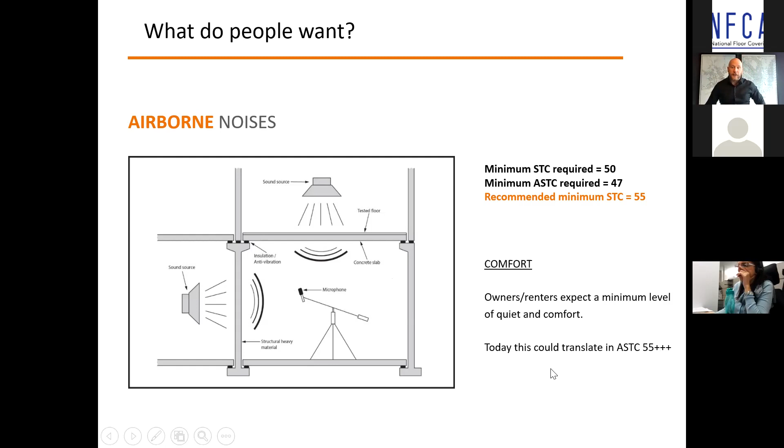Okay. As far as impact, a different animal completely. There's no IIC required in Canada. Therefore, there's no AIIC required by code, but the recommended minimum is still 55. So the building code recognizes that it should be about the same number, but it's not required by code. Ironically enough, 80 to 90% of all complaints we see come from impact transfer.

And Chris, your example with the water bottle could be expanded to moving furniture, to walking around, to dropping objects, opening doors. Anything in contact with the structure is creating nightmares out there for all kinds of structures. So we see it day in, day out.

And ultimately, the level of comfort people are looking for, there's nothing to justify it be lower than the one on the airborne. Meaning, we should most likely shoot for 55 and higher, and too often we end up much lower than that. What that means is we often see a discrepancy, because it's not in the code, between the STC and the IIC. So the number of times we see a building shooting on the airborne side, whether it's floor ceiling assembly or wall to wall, 55 plus, but then we see the IIC in the 40s is weekly,

which creates obviously a major issue, because people are not complaining about the sound they hear as far as television or noises or voices, but they do hear their neighbors walk or moving furniture or kids playing. So ultimately, what I am saying is, again, people don't know what the code requires or even recommends, but as far as we're concerned, a 55 plus should probably be what we're shooting for, because that's what consumers, condo owners, renters, or even going to a hotel, that's what they expect more than ever before.

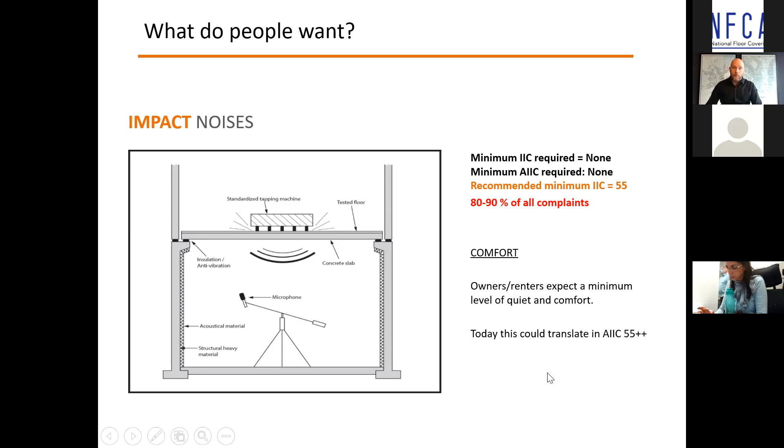Okay. The other thing that obviously is related to issues would be misunderstanding and application of the principles. So last month, we covered pretty basic acoustic principles: mass, resilience and decoupling, void treatment, sealing and flanking. So right now I'm addressing this to people involved in new construction, but also retrofit.

A lot of times when we're building, I'll give you an example on a light wood frame building. A light wood frame building, all of a sudden, because of cost and everything else, we start reducing the weight load of that particular building, but we don't realize that it will have a direct impact on how noisy and how much vibration is going to go through that particular building. So a lot of times we make design-oriented decisions without necessarily understanding what the downside is going to be. And we see that a lot. So that's a good example.

The mass is, do we have mass? Example, if a strata has a wood frame building and there's no topping, there's no mass, well, you cannot expect out of the gate the same performance, despite the underlayment you'll have to ask for. Your building is still not going to be at the same place as another building that may have a topping or that may be made of concrete.

So understanding that mass, resilience and decoupling, which is directly linked to how much vibration is making it through the structure, how much void treatment. So ultimately, if it is a light wood frame with a ceiling, how much insulation is in there, ceiling openings, pot lights, air vents, ductings, all these kinds of things. How treated is it, whether it's new construction, and what we're going to do in a design stage, but also on the existing building, what was done when it was built, and flanking.

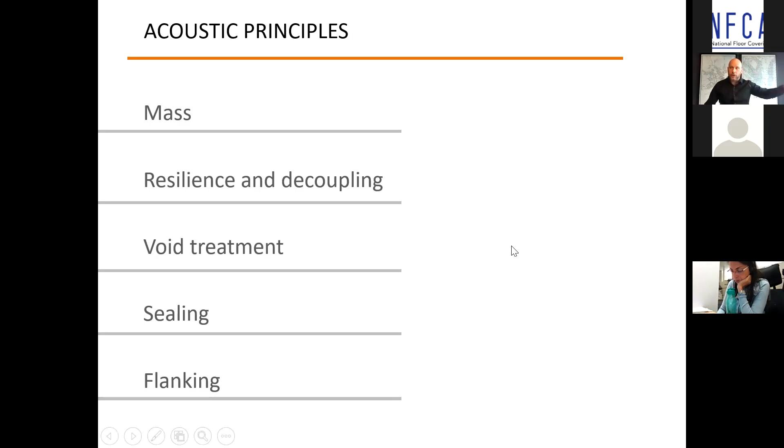Okay. So again, if you want more information on these with videos, which we showed a month ago, be more than happy to show that to you. Please. Just to give you a sense of what happened in that file with those two videos, there's nothing that they can do to retrofit or change that building. No one's going to rip out the flooring, take apart the structure and put it back together.

It's not going to happen. So we just came back with a bunch of advice. Covering the high traffic areas with 60% area rugs was one. Have a meeting between the two owners so that they understand that one is not just a hostile, nasty person who's trying to keep them up all night.

Yep. Convey the time schedules. Like one person was going to bed at a certain time, which was, you know, an active time for the person above. And you find that you can get people to work together, provided they understand what the problem is. No one wants to upset anybody. So that was an interesting case. And I think we got them over there. They realized there's really nothing they could do. They just had to learn to live together.

Chris, those are phenomenal points. Ultimately, especially on an existing building, you're dealing with perceptions, you're dealing with humans. People hear things differently. That's why I referred at the beginning to expectations, but also you're correct. In some cases, it's going to be hard to apply some of these principles depending on the situation, but at least understanding where it's failing or where the issue can come from points us in the right direction and we're not fixing the wrong problem. And more importantly, we're not spending money on things that are going to be completely irrelevant. So this is a great example and good add-ons.

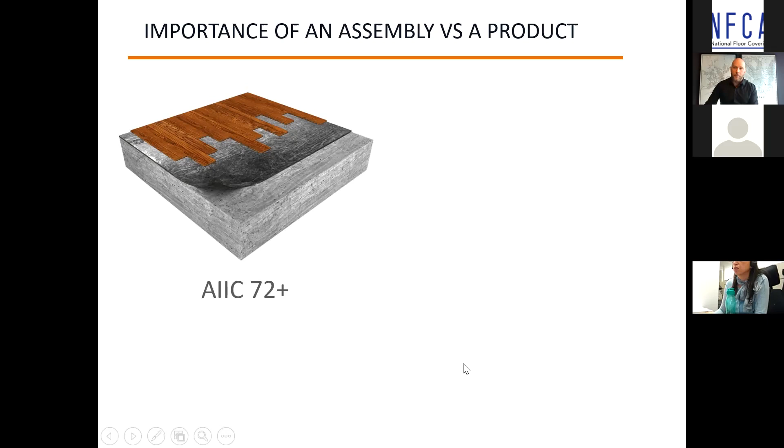We see a lot of high numbers being thrown out there right now in the flooring industry. Even though a lot of people are aware those numbers aren't achievable, we don't always know where they're coming from. So first, you can never associate a rating to a product. I've probably said these exact words 1,000 times, if not 2,000 times in my career. When you're doing a test, you're testing an assembly, not a product. So if somebody shops in a store and says, I need an underlayment that gives me a 72, we're already wrong, assuming the underlay itself is going to give any kind of rating.

It will contribute, but we need to know what it was tested with and where it's actually going to contribute to better performance. Because I've also seen adding products into an assembly that did not bring anything. I've even seen it make it worse. So we have to know the building structure and the context of that particular assembly, application and building. So what we should do is, somebody walks into a store looking for data: okay, what is your building structure? Do you have the drawings? Do you know how it was built? And if we don't, it'd probably be interesting to talk to the condo board and gather that information.

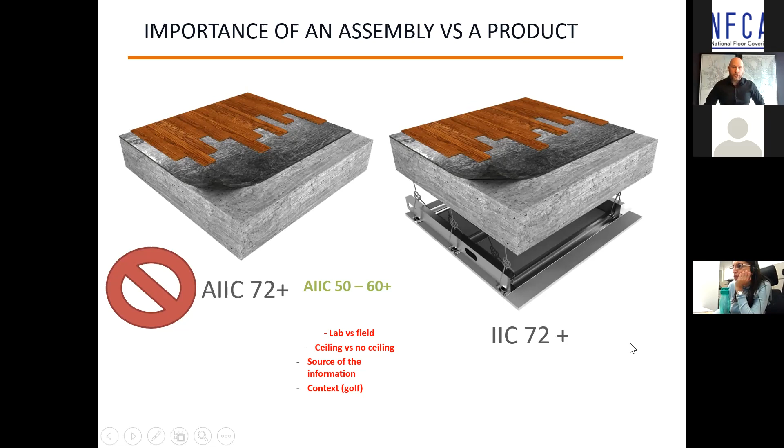Role played by the structure. Again, we're into the design, understanding what the building structure is capable of. It's not true that because you're on concrete, you're good to go. High frequencies on concrete are a lot more problematic than people think. Chris, if you had done the water bottle drop example on a concrete slab, you would have been surprised how noisy it is in the unit below.

It's actually very prone to transferring high frequency, like dropping a water bottle, high heels, or moving furniture. So concrete structures are not as bulletproof as people make them sound. There are certainly some areas we've got to be careful with. And steel, wood frame, and mass timber, we'll touch on in a minute.

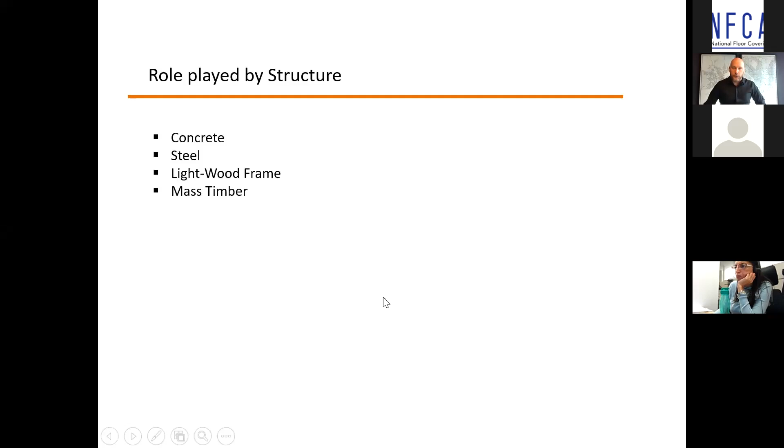Yeah, I remember being in a concrete home one time when the people were renovating upstairs, and they were using a Kango-type jackhammer to get the old flooring out. That thing may as well have been right beside my ear. It was absolutely transferred 100% into the space below.

100%. It's interesting that you make that observation. That concrete's thought of as being a great way to sort of kill noise, but it's not necessarily. You're 100% right, Chris. And again, it's coming from thousands of tests, and if you look at the slide, the concrete towers, the concrete slabs are going to be very efficient for low frequency. Low frequency and then high frequency would be your knuckles on the table versus your fist. So low frequency, very efficient, no doubt about it, because it's heavy.

Whereas the high frequency, the jackhammers or anything that's more of a distinct kind of sound, or something quite hard on the slab itself, or even if it's a glue down vinyl, whatever it may be, it's very distinct and it travels through the whole building a lot easier than we think. So you're correct. It's not as bulletproof as we think.

And one of the biggest differences between concrete structures and other structures is there's usually no ceiling. What that means is you find yourself having a hard surface floor, possibly an underlayment if there's one, and a concrete slab. You have one shot at applying the principle of decoupling in that application. Yeah. You can only do it once. So you better choose the right thing that's going to compensate for that lack of performance on high frequency. So when we get to the underlayment, I'll touch on that.

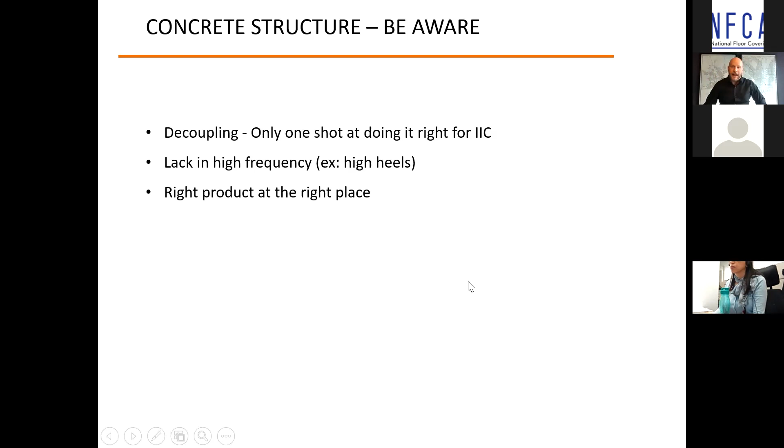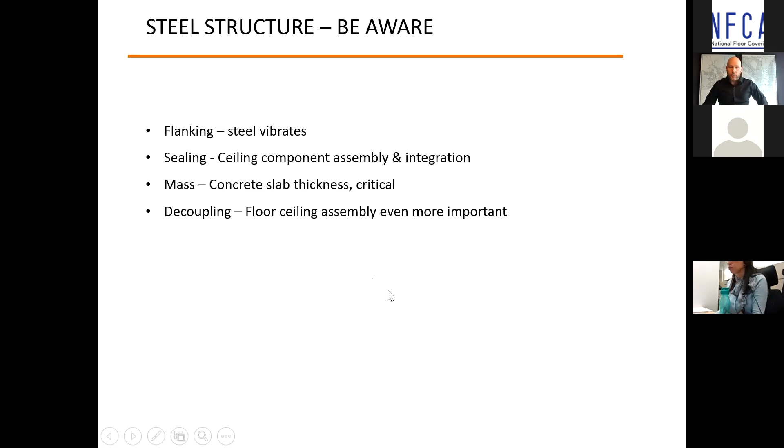Similar with flanking, again, steel structures, steel will vibrate. A bell at church isn't made of wood, it's made of steel. It vibrates so you can hear it from a distance. This is no different. When you're dealing with steel structures, it will vibrate. We need to mitigate that vibration. We need to control it somehow. Good news is there's obviously solutions to that at the design stage, whether it's in the ceiling or underneath the floor. So there's assemblies that are designed to do that. Okay.

Light wood frame, a lot of components to play with, which means we can do some great things. But a light wood frame, by definition, because it's lighter, all of a sudden you're running out of mass. Decoupling is even more of an issue. Ultimately, because it's porous, if you create vibration and energy, it's going to travel all throughout the building. So wood frame buildings tend to have a bad rep. But if we actually play with the components, apply the principle, manage expectations, we can do great things. But only if we do that. If not, we're stuck in the 40s, and then complaints and lawsuits are up to wazoo. We see it day in, day out.

That's even more true on existing buildings that were built 20, 30 years ago, because some of the technology was not even applied then. Imagine when you have a wood frame building, 4-story or 3-story, and there's absolutely no mass. The floor is directly over top the plywood. Well, then you're in trouble out of the gate. You haven't even started, because ultimately that vibration is going to have a party making it to the unit below.

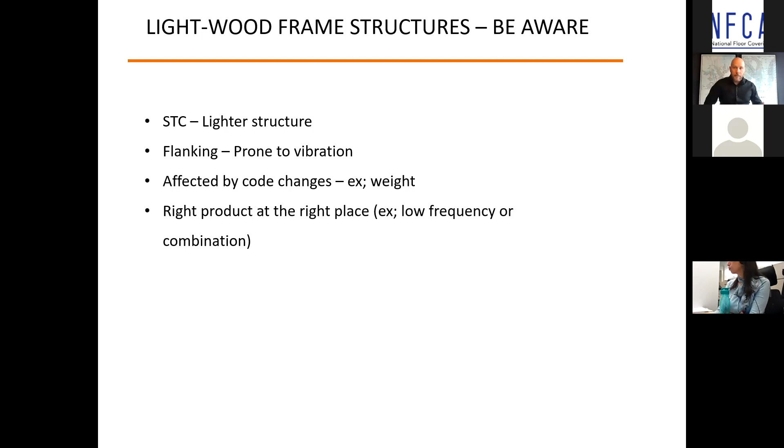Okay. Andre, we're at the 1:30 mark.

Perfect. Thank you. So mass timber, for those of you that are aware of what mass timber is, obviously the big thick slabs, it's getting extremely popular. But again, a concrete tower, imagine that made of wood. If there's usually no ceiling because people want to see the wood underneath, that means you better do a really good job at decoupling on top, because the slab of wood is lighter than a slab of concrete, which means the principles are playing against you.

So there are solutions to that at the design stage, but we need to look at it at the design stage. If we don't, we're going to find out the hard way that the building is going to be vibrating and flanking like no tomorrow. And then obviously it's directly linked to issues, complaints, lawsuits. And we've heard of them.

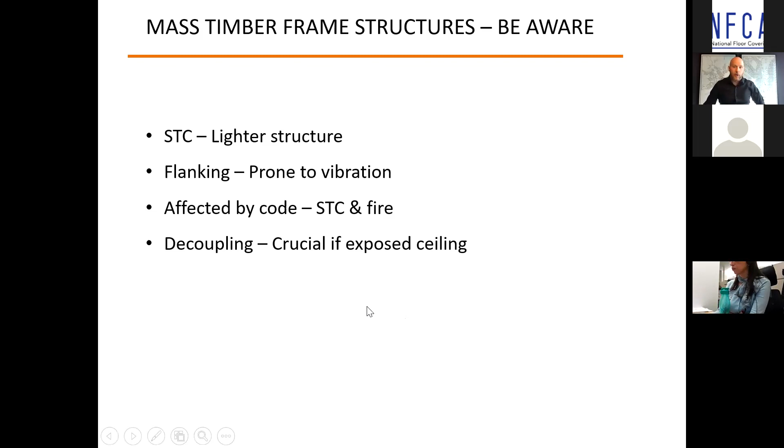We've worked with people that had issues that will never want to go through that process again. Okay? Andre, just on the topic of products, when you mentioned that, it's interesting. My mind sort of visualized, what would you put over that wood substrate to kill the noise or decouple the noise when you got the people down below want an exposed ceiling because they want to look at the beautiful

wood. I remember back in the day when we did a few of the floors in the Wall Centre, and they, on that job, specified a 1/2 inch thick rubber product, which was ribbed halfway through. So quarter inch of it was ribbed, like corrugated almost. And we had no idea whether this was actually going to work. It was really expensive. But what do you recommend as a product that might kill sound in a wood frame structure with that scenario?

So understanding the NFCA format, I'll be cautious with my answer. Put it this way, Chris. There are solutions and there are products. We have products in our lineups. It's not only often like an underlay, there are structural systems that exist that are designed to compensate for that mass, and in the meantime, creating that decoupling. So we have systems for light wood frame, for mass timber, that are designed to do exactly that. But the only way you bring a product to market in these applications is understanding how that structure is going to work and where the weakest points are going to be.

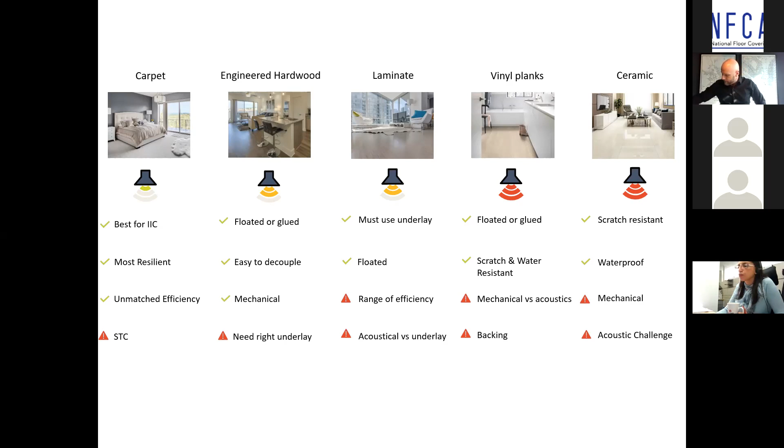Yeah. Okay. So there are ways for that. Question, Andre. Yeah. Kim Anderson in Winnipeg. Just a quick one. Now you're testing specifically on the entire sandwich, everything that's in between. Yes. But if a designer, let's say, who's getting befuddled by all these IIC figures from suppliers selling it to them, I think we talked about this in the first part, was ASTM E2179, which has got to do with sound impact reduction.

If you wanted to compare product A against product B, that's probably about the best you're going to do, and you're going to find out they're probably pretty much the same. Because say on resilient, 2 millimeter resilient, you're going to get a sound impact reduction of, I think it's 5 decibels. On a say a 5 millimeter click product with an acoustical back, the sound impact reduction's around 20 decibels. So now you have a comparative product to product, not IIC, not the whole sandwich, just component to component.

Is that? You're referring to the delta to some extent, correct, Kim? 100%. Yeah. I'd love to, because you interviewed last time and I enjoyed your comments, and I enjoyed it now too. I'd love to have a conversation on the side with you on that front, because the delta, there's certainly some great things about it, but there's certainly some little angles to it that we need to pay attention to. But you're correct. I mean, it's a good indicator.

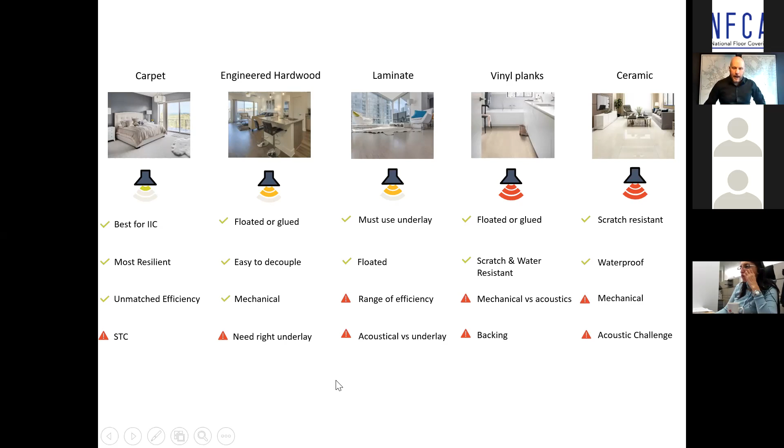So ceramic, again, very, very hard, extremely difficult to sound insulate. So once again, using the right product underneath, there is a way to soundproof tile more than we think, but it's never going to compare unless you build it up to a different floor covering, simply because it's much harder. Underlayment, we kind of touched on that. I'm not going to go into this. So ultimately, using the right thing at the right place, I'm telling you, it goes a long ways. In some cases, a certain technology will outperform another one, and then the exact opposite on a different assembly.

So to some extent, if we understand the principles, where the weaknesses are. For example, if we work on a building where the high frequency is more problematic, we'll cover the high frequency with the right underlay. If it is a low frequency that we're going to run into, we're going to cover the low frequency with the right underlay. So dealing with people that understand this and are able to navigate through this, you'd be surprised, for the same amount of money, how much more performance you can get simply by using the right thing. Okay.

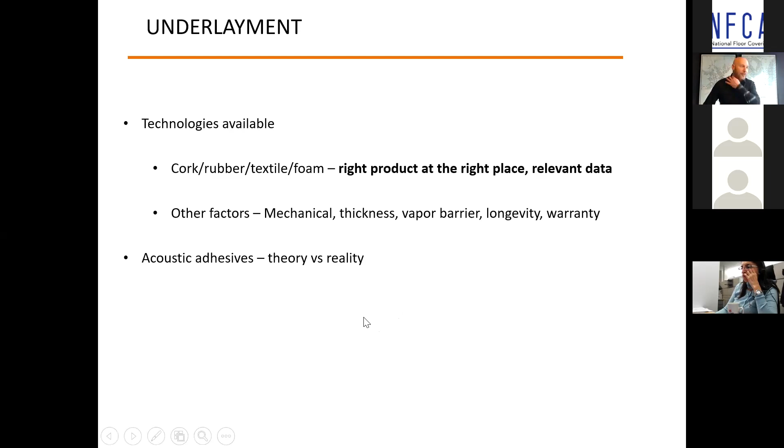Installation, and I'll finish on this, Chris. A couple of little tips. Obviously, it goes without saying before installation, proper surface prep and site conditions. I mean, the NFCA, you guys are extremely involved on that front. We cannot stress enough how important it is. Decoupling the floor covering from the structure goes a long ways. You can decouple the floor all you want, but if the floor is touching the wall or we're bridging some of the components, it can obviously be devastating to the overall performance.

Decoupling furniture from floor covering, huge. So when you're moving a chair, it's not hard on hard. It's ultimately like a pad underneath. It's going to go a long ways. Percentage of surface covered by area rug. You touched on that a little bit earlier, Chris. Not everybody wants to do that, but to some extent, if you are in a position where nobody's changing the ceiling or changing the floor, well, you're kind of running out of options. So yeah, covering some of the traffic areas with rug is certainly going to muffle a lot of the vibration that can be created. No doubt about it.

Avoid ceramic tile in common or high traffic areas. Ceramic tile conducts more than anything else. No questions. So ultimately that is something that we would recommend depending on the situation. Using professional installers. Obviously the education with the installers, we're all about it. To make sure again that they understand what we're trying to do all together, and everybody gets together at the design stage, and then follow manufacturer's recommendations, which would touch obviously on the mechanical and everything else. So those are some tips on that front.

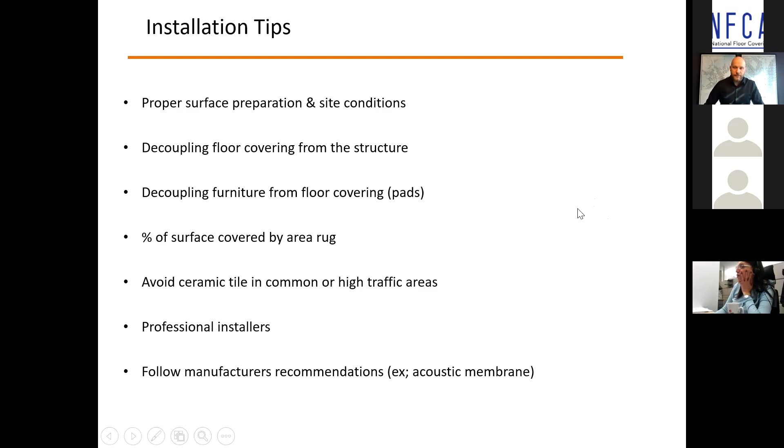I think it's a great list. You just made me think again that I'd underline in the specs, if this is possible for any spec writers out there, the importance of leaving that expansion gap around the perimeter for the flooring. The manufacturer requires it anyway. If you don't, and you leave the floor tight to the wall and there's expansion, all that floor experiences is stress at the joints. Not only does it start to creak and squeak, but you're now going to have that tuning fork scenario where noise gets transferred from one floor down to the floor below. So how do you underline installers leave expansion gaps? We see it all the time in inspections. The number one thing that is causing problems out there is no expansion gaps.

They don't respect it. And not only that, Chris, I can even tell you in the ceiling, we work in the ceiling, right? So short circuiting a resilient channel or a suspension system. Anytime we short circuit anything, anytime we get something to touch something else when it shouldn't touch, you're going to jeopardize performance. And we see crazy differences between something that's installed properly and something that's not. It's unbelievable. You can see 5, 6, 7, 8, 9, 10 IIC difference between the two, even though it's the same products used in the assembly. It's extremely important. Yeah.

I'll finish on this and we'll go to Q&A. Requirement versus expectations. People expect more than what the code asks for. So it's our responsibility to decide where we stand on this. We've made our choices. People can make theirs. Ratings equal an assembly, not a product. Follow the principles, read the fine print, the right product at the right place, talk to the right people to get the right information. Proper installation is a must. Better acoustics equals less frustration. Any questions or concerns or comments?